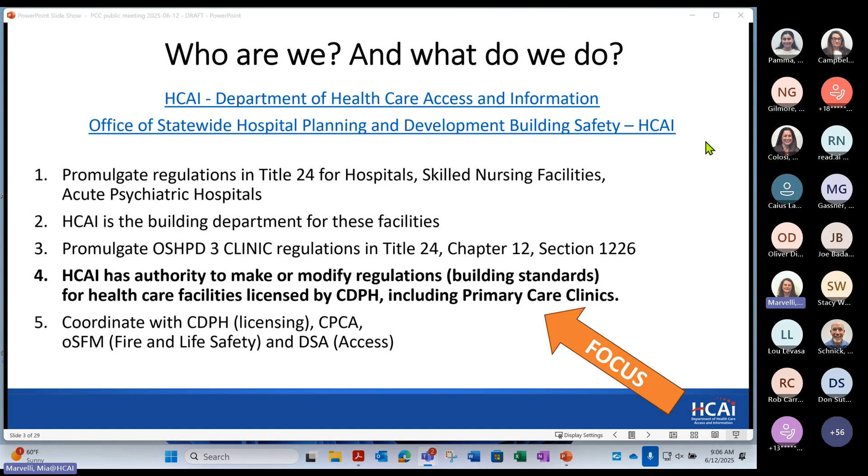The purpose of today's meeting is to right-size the primary care clinics regulations. We want to hear from you all on the challenges that you face getting compliance for OSHPD 3 and also how the regulations read. That's really our goal, is input on that.

We welcome any input on this, and we'll also be providing a slide in a little while that has an email address where we would very much appreciate email sent directly to us with suggested edits to the regulations, but also reasons why the change is needed. That is helpful for our regulatory process.

We are also going to explore ways in Title 24 to amend so compliance can be efficiently accomplished. And we also would like to discuss how to update what we call a code application notice, a CAN. And right now that is number 1-7-2100. We're looking at developing that more into a guide that can have more examples of clinics.

Currently, that CAN covers different types of clinics, and we're wondering if we should have different guides for each type of clinic, or maybe just subsets. So those are some things we're looking into. We'll talk about this a little bit in the future too, but we really would like your feedback by June 30th. I know that's a short timeline, but later on in the presentation, I'll be explaining the timeline for the regulatory process and the need for feedback as soon as possible.

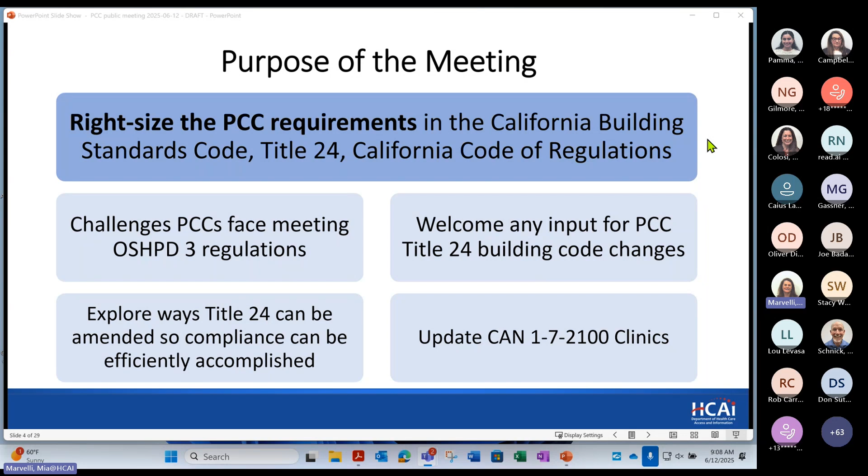Okay, so let's just recap what is OSHPD 3, so we can set the stage here a little bit. So Title 24, as we've talked about, contains minimum building standards or regulations for the construction and alteration of all buildings and structures in California. Title 24 is comprised of building, fire, electrical, mechanical, plumbing regulations, energy and sustainability regulations. There's actually 12 parts to Title 24, so it's a large volume of books, we'll say.

And our authority is to develop regulations for hospitals, skilled nursing facilities, and psych facilities, in addition to clinics that are licensed by CDPH, not all clinics. HCAI and OSHPD amend Title 24, Chapter 12, and specifically Section 1226.6 for primary care clinics. And again, we talked about the law. I listed it here. The law defines primary care clinics in the Health and Safety Code.

And just a reminder that CDPH is responsible for licensing primary care clinics and other clinics, and they promulgate Title 22 regulations, which oftentimes point to the Title 24 regulations. I'll just say that the law states back to 1204A, the law states only the following defined classes of primary care clinics shall be eligible for licensure, and those are called community clinics and free clinics.

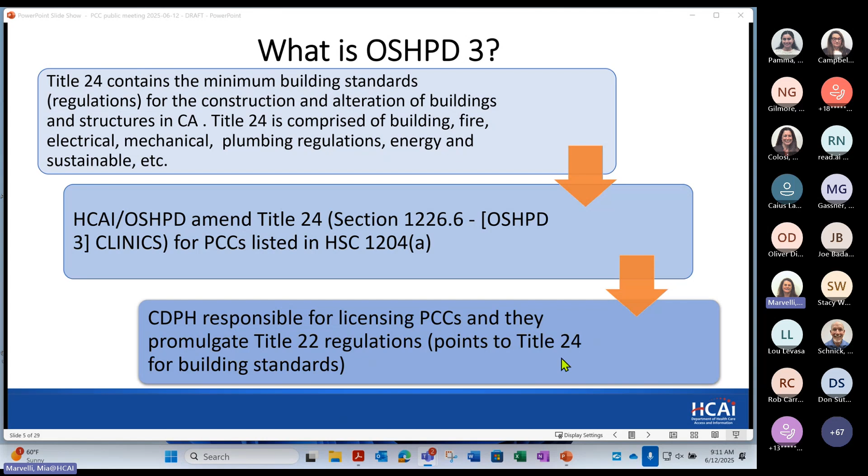All right, so let me go through. While reviewing the California Building Code, the architectural features, we looked at the scoping and application sections, and we noticed that the charging language could be amended in a few areas, and I'll get there. So the slide I have up right now shows all of the sections within 1226, and today's focus is primarily 1226.4 and 1226.6.

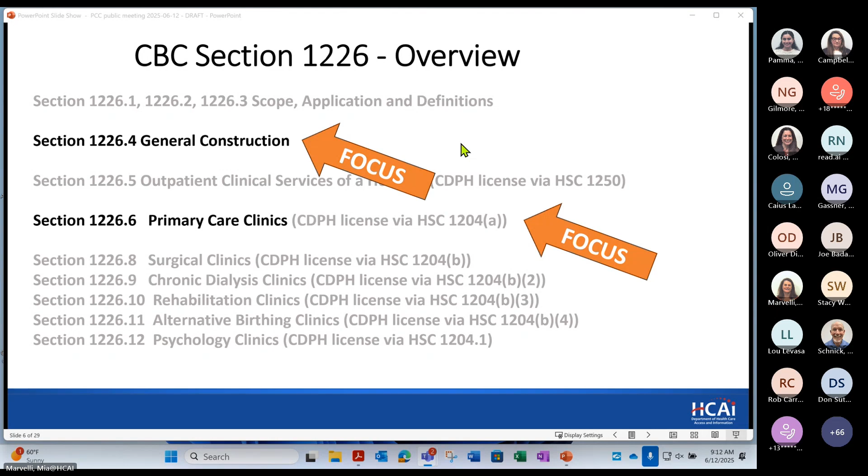So the scoping language at the beginning of 1226, the provisions of this section shall apply, and it points out primary care clinics include free clinics, community clinics. And what we're thinking is, would it be helpful to have some pointers to the Health and Safety Code for folks? Because what often happens is we get calls about clinics in general, and we need to ensure that the owner and operator first determine, are they being licensed through CDPH and how? And these laws tell them that. So we thought there would be an opportunity to add some of these Health and Safety Code pointers to that.

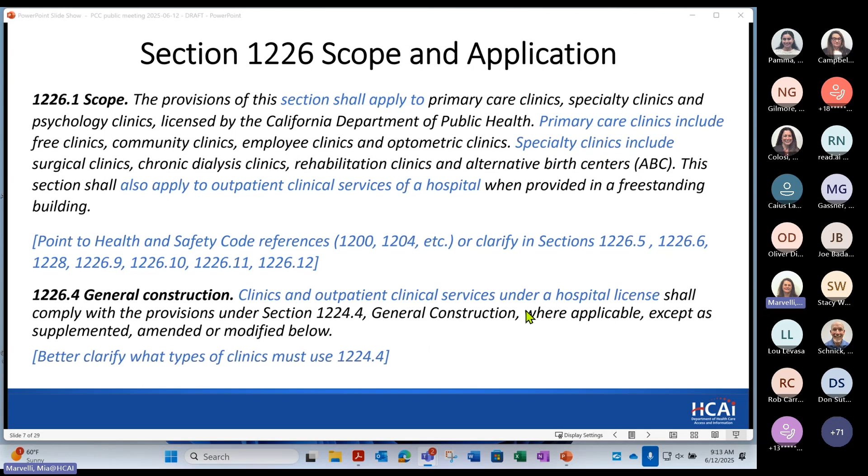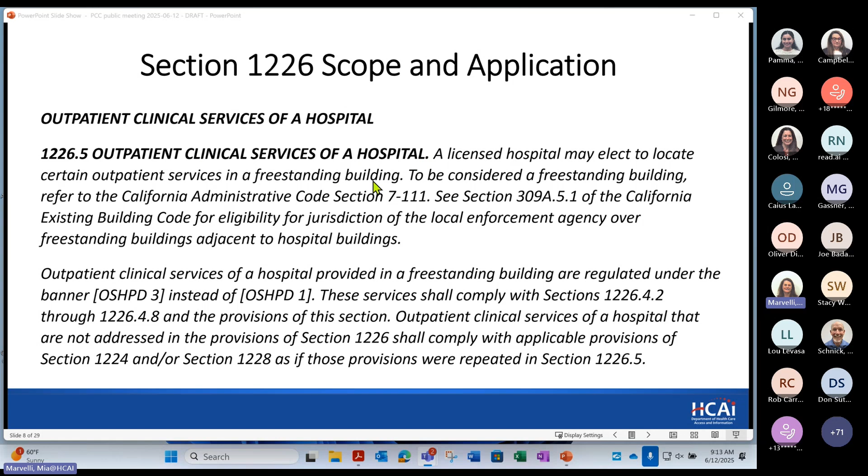And then, as I pointed out, here's section 1226.4 that says basically clinics and outpatient clinical services under a hospital shall comply with the provisions in this section, except where modified below. Should we better clarify what types of clinics must use 1224? So that's something we'll be looking into. Here's the charging language for outpatient clinical services of a hospital. I'm not going to read it all, but there may be opportunities here to clarify some information.

And then, of course, here's the charging language for primary care clinics. So primary care clinics and outpatient clinical services of a hospital that provides services equivalent to primary care clinics shall comply with 1226.4.3 through 1226.4.8. That's back to the general provision and the provisions of this section.

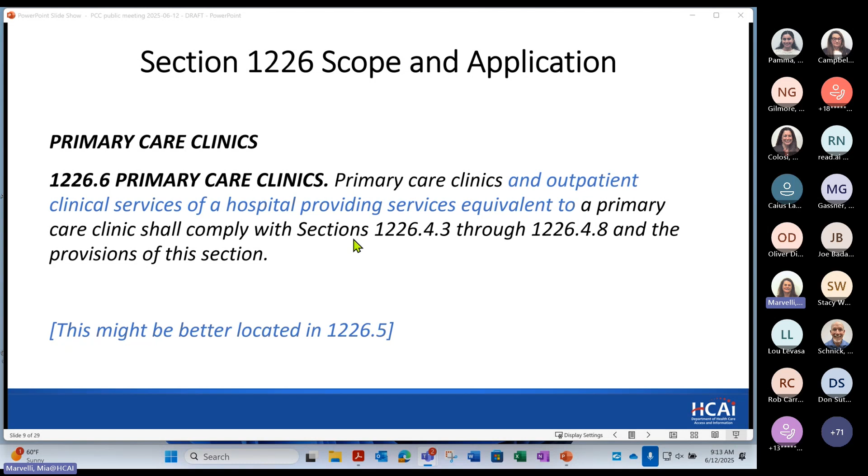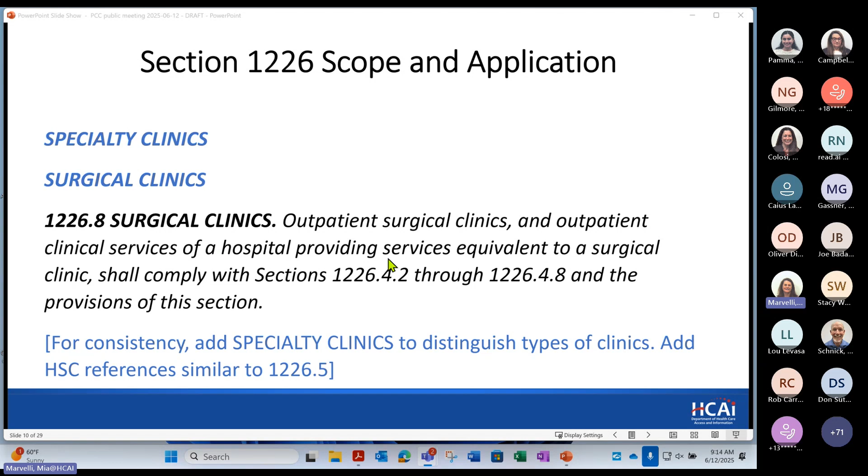Okay, so let's look at the comparison. We're gonna dive into the comparison table for the architectural features. But before I move on, I want to open it up for any questions. If you have a question, please raise your hand and we'll call on you to unmute. Joe, I see you have a question. You could unmute and ask the question, please.

Yes, the code changes that are being considered for primary care clinics, would those also be extended to hospital outpatient services that are equivalent to primary care clinics, or would hospital outpatient services be excluded from these proposed code changes? It kind of depends on where the overlap is. So for example, if we're considering for a very small clinic to, we'll say, reduce the fixture count, that possibly could help the clinic under a hospital license.

Okay, that's helpful. As a general rule, Joe, the clinics under a hospital license are capable of seeing up to 25% inpatient. So the standards will be held to a higher level. Right, I understand that. With my experience doing almost 24 hospital outpatient clinics, virtually all of them are remote enough from the hospital that they would never send an inpatient over there. They're like a block or 2 blocks away. They have to be within 250 yards, but I understand the 25% provision, but it results in a lot of overkill often.

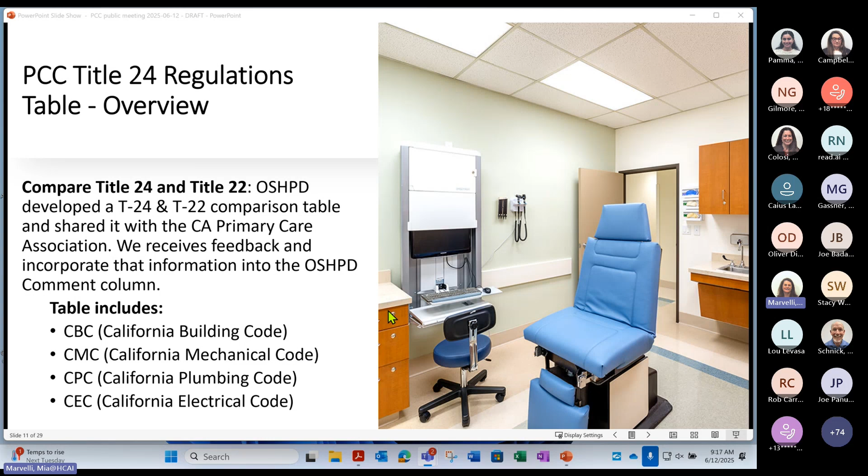Okay, so just a brief overview of the comparison table, and I'll call it up here in just a second. It's broken up into different sections. So the first section we'll talk about are the features in the California Building Code, and then Larry will talk about mechanical plumbing, and then Jamie will talk about the electrical part. Let me pop over really quickly to, here's the table. Okay, it's presenting. All right, good. So we've got 4 columns here.

The first 2 columns list the requirements, items, rooms for the primary care clinics. And we summarize the Title 24 section number and requirements pertaining to the item. So it's not the full text. The next column is Title 22. Many of the Title 22 regulations are related to space needs, operational functions, or reference back to Title 24. And then the far right column is our OSHPD comment.

These comment notes are based on prior discussions with the Primary Care Association and architects familiar with primary care clinics, and also a lot of the questions that we do get on clinics. We took their comments and edited the OSHPD comment column for today's meeting. You'll see that some comments say to be addressed in a guidance document, because what we're finding is there's really little opportunity to change the regulation because it might be out of our authority, but we can certainly clarify it in a guidance document. And one example is corridors, which we'll talk about in a minute.

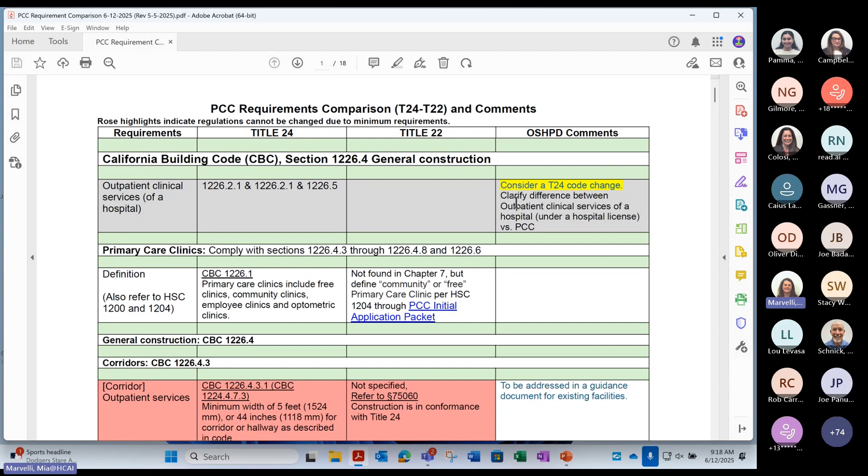And then, as you can see on this table, there's some rows with highlighted items, and those are either out of our authority or they're minimum building standards.

Some of these might be state fire marshal related that we don't have the authority to change. Some of them might be access, and in some cases they're kind of the minimum requirement. So that said, we also have identified that these may benefit from further clarification. For example, there are several requirements for corridor widths depending on the patient care. And for the most part, primary care clinics would not need to meet the higher standards. This can be clarified in a guidance document.

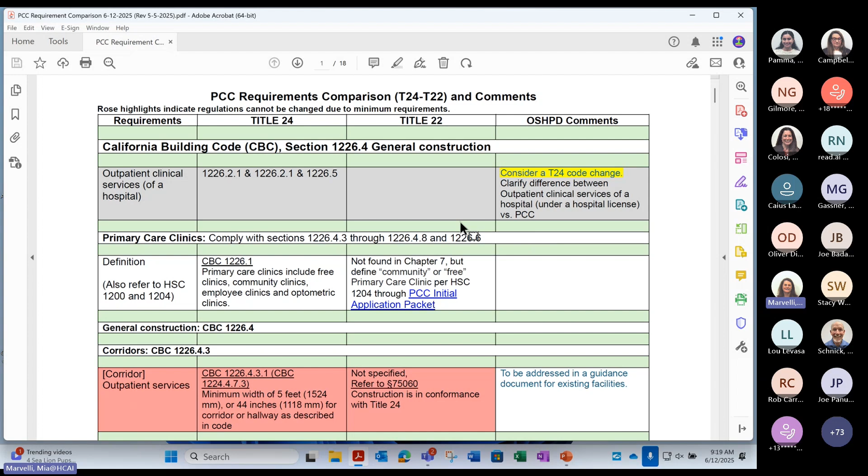Can you clarify rose and rows? Yes, rose colored, highlighted rows, ROSE, versus the ROW row. Sure.

Okay, all right. I'm going to move on to the first part of primary care clinics, which is the general provisions, which is in 1226.4, which many of the clinics point back to. We'll talk about corridors a little bit. So I think the key here is outpatient clinics and outpatient departments consisting only of waiting rooms, business offices, doctor's offices, and exam rooms, where there is no traffic through such area or other services or exits, shall have a minimum corridor hallway width of 44 inches.

So there's a lot of wiggle room here for just the minimum 44 inches. There may be instances where you have to meet the 5 feet. And I'm going to go through all of these and then we'll pause for questions on that. So just keep rolling here. It's probably pretty rare that a clinic would have, again, we're not talking about surgery clinics here, but it's pretty rare that we would have a clinic with bed and gurney patients that would require the 8 feet.

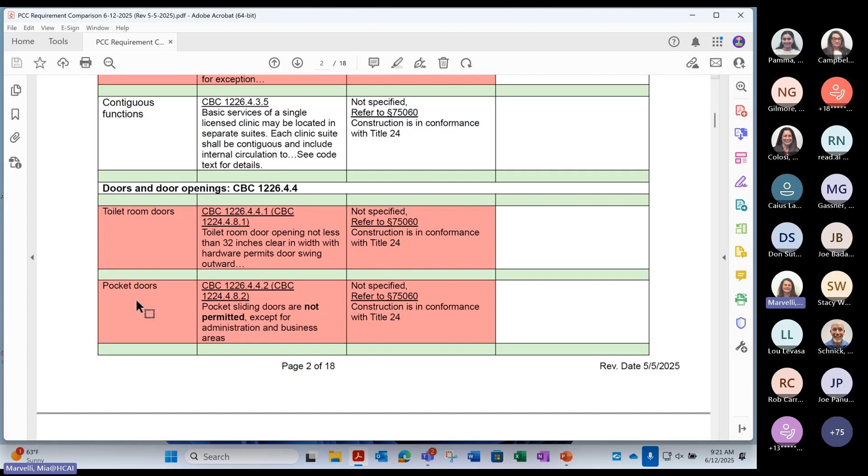I have pocket doors listed here. So what we're finding is we get a lot of questions about, are barn doors allowed? And we've done some research and barn doors are allowed in exam rooms and treatment rooms. And so we may add an edit that explains barn doors. Also, we're looking at if the doors should swing outward in the clinic. In the toilet room? Okay.

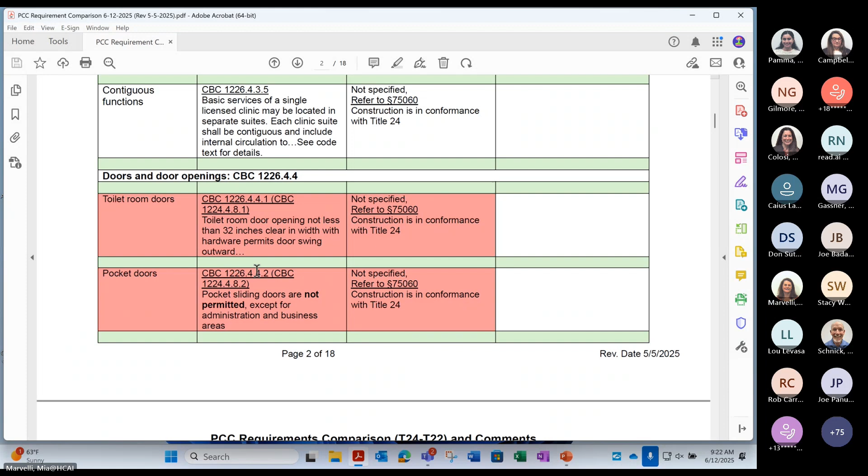Not really much to say about windows and screens. Those are not required in treatment rooms or exam rooms. So that's really for patient rooms. We get a lot of questions on the minimum ceiling height. Right now, the minimum ceiling height is 8 feet. We understand that this can be challenging when you're modifying an existing clinic. We actually have, in the checklist that we have for clinics, a provision that allows the ceiling to be at 7'6" if you're remodeling, if it's an existing clinic. Again, we have to set a minimum in the regulations.

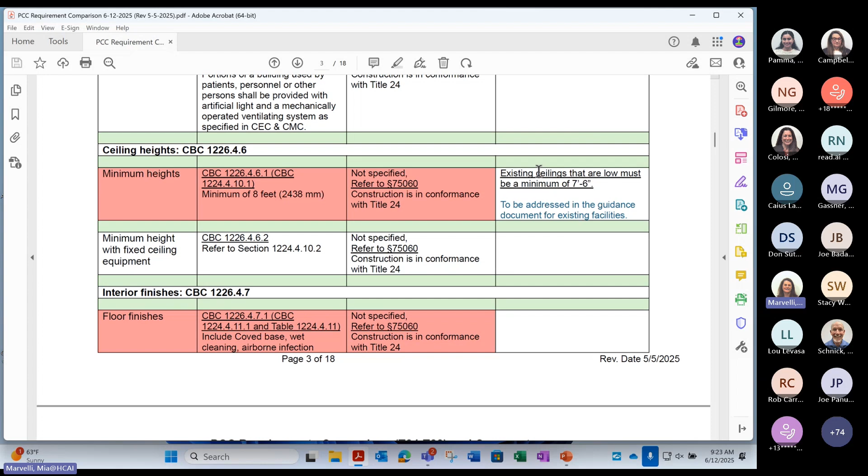We had a hand up for that one. We can pause and go. We have a raised hand from DS. Do you want to ask your question? No. Lowered hand? Okay. All right, I'll keep rolling here. We have a raised hand from Glenn. Okay, Glenn. Yeah, good morning.

A clarification on what you just said, Mia. When you say existing clinic, is it an existing licensed clinic or is it a non-licensed space that was providing medical services that's becoming a newly licensed clinic? It's supposed to be a previously licensed clinic. Okay, thanks. So, no, it's an unlicensed clinic that's trying to get their license, because their previous license is probably going to already meet the requirements. So that's why we're allowing a little flexibility for the non-licensed clinics that are trying to get licensed to become OSHPD 3. Okay. That makes sense, Glenn?

Sort of. It really depends, Richard, and we can talk offline about some of the stuff that I've seen come in before. But I won't belabor this point. Yeah, but we're trying to put some flexibility for existing conditions, like an exam room that doesn't quite meet the 80 square feet. There's going to be a minimum cited in the guidance to say that we're not going to make them make the exam rooms larger. And so we're looking at those as options. The difficulty at times is doctors' offices wanting to become licensed clinics. Understood.

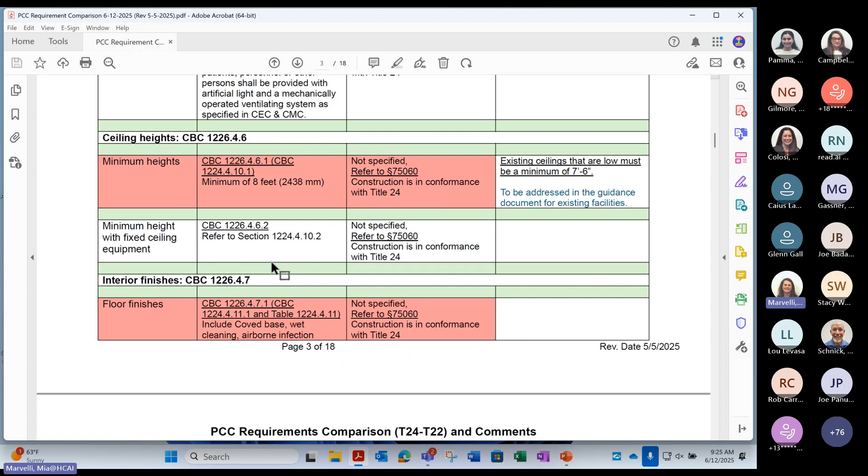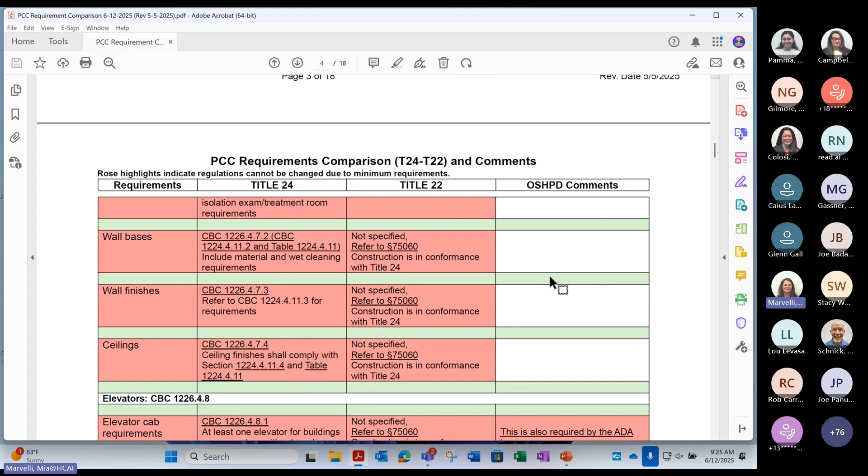Thank you. Thanks, Glenn. I'm going to go kind of fast through interior finishes here because we don't seem to get a lot of comments; we did get some comments on wall base and coved base. We're going to take a look at that. We may have an error in some pointers. But this is pretty basic minimum need for infection control.

Yeah, I thought I heard someone, sorry.

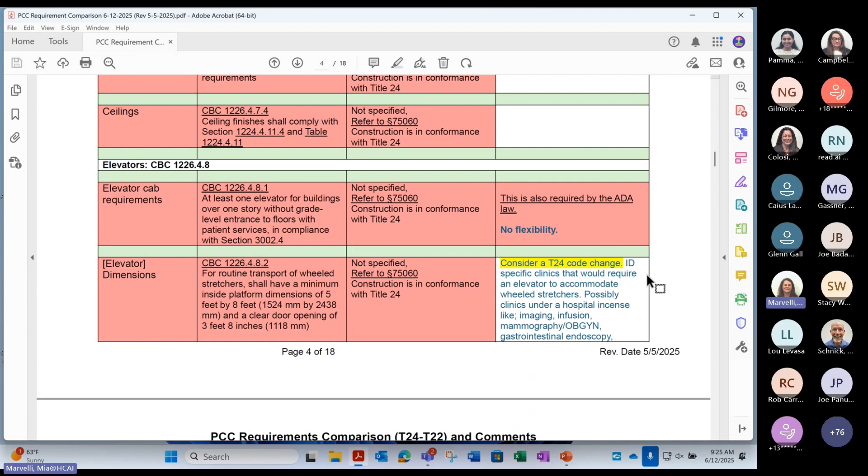Again, elevator, this could use some clarification in the guide, but the reality is the elevator cab sizes are out of our authority to change. Those are either state fire marshal or ADA requirements.

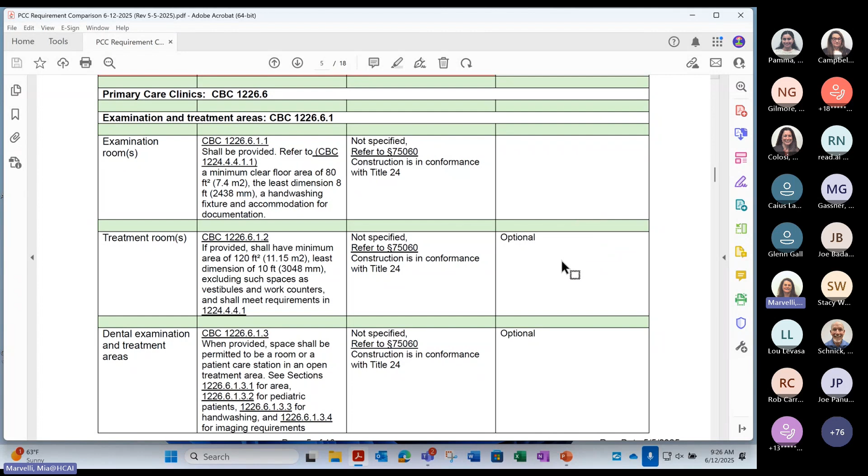Okay, so now we're entering into the actual primary care clinic section. Exam rooms, we've talked about this minimum of 80 square feet with a minimum dimension of 8 feet. It does require them to have a hand washing fixture and accommodations for documentation. Treatment rooms are optional, so we have some minimum sizes for the treatment rooms. I'm going to skip dental. It's pretty rare that a dental service is provided in a primary care clinic, but the features are there.

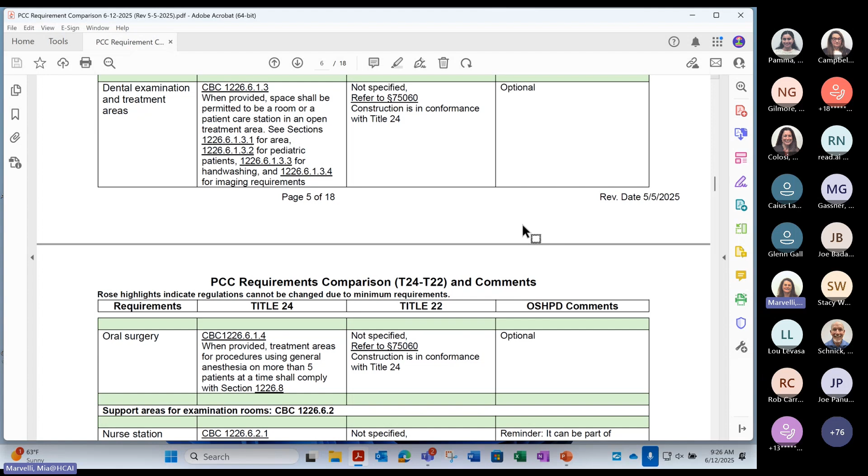One thing I forgot to mention is when the clinic regulations were first developed, we paralleled the FGI guidelines, outpatient. And while California is not mandated to adopt those, they are a national standard that's used for reference as a basis for the code. So there's support areas for the examination room. Just hold on one second here.

So the nurse station, perhaps there is an opportunity for a code change here. I think traditionally the nurse station was considered support for patient rooms, but this area can be combined with other areas and can double as a charting station. So we'll look into this a little bit more, but this also could benefit from some changes.

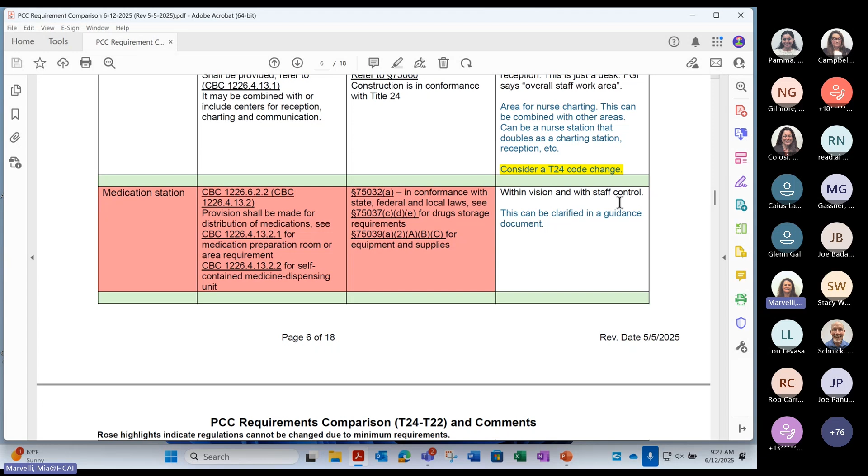Medication station, really, you just have to have something within the visual control of the staff. And this could be clarified in the guidance document. It doesn't mean that you have to have an entire medication station.

And then we get into areas like the clean utility, soiled workroom, garbage, soil waste, medical waste. There seem to be a lot of questions on what's required and the sizes for these, because I think there's only one of them that has a minimum size standard. But what we need to know is, in many cases, these must be separated, because we're trying to minimize the risk of cross-contamination for infection control. This includes separating the clean and dirty areas.

That said, if minimal space is needed for housekeeping, again, if you have a small clinic and you don't need a lot of space, you can use a cabinet or closet, and the same for clean utility, soiled holding. These can be small areas as long as they're separate spaces. Anything to add on that?

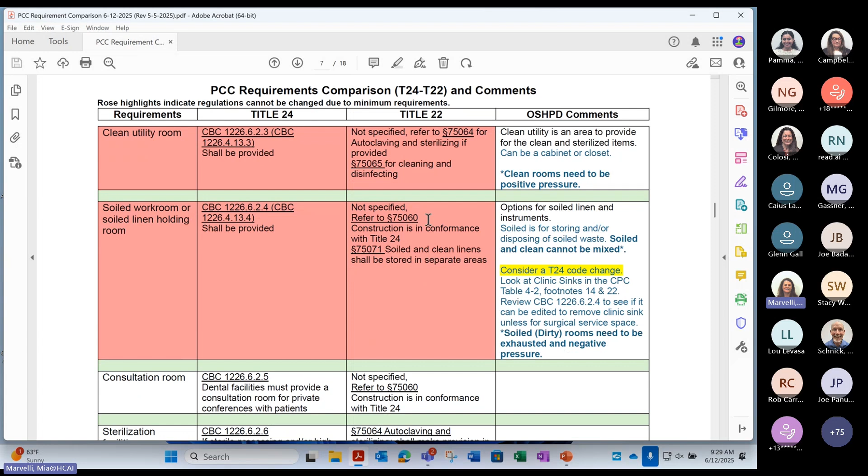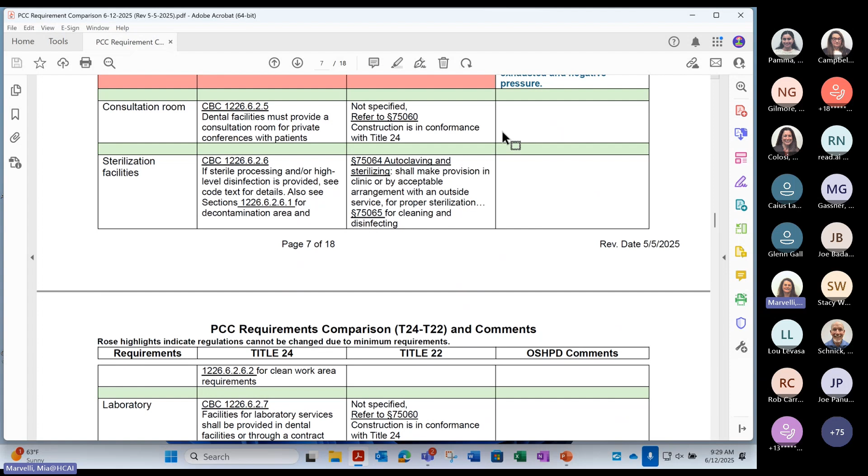This consultation room is actually for dental facilities. Sterilization facilities, this is if it's needed. You may not need sterilization facilities in a primary care clinic. Same with lab facilities. So then we get into the support area for the patient.

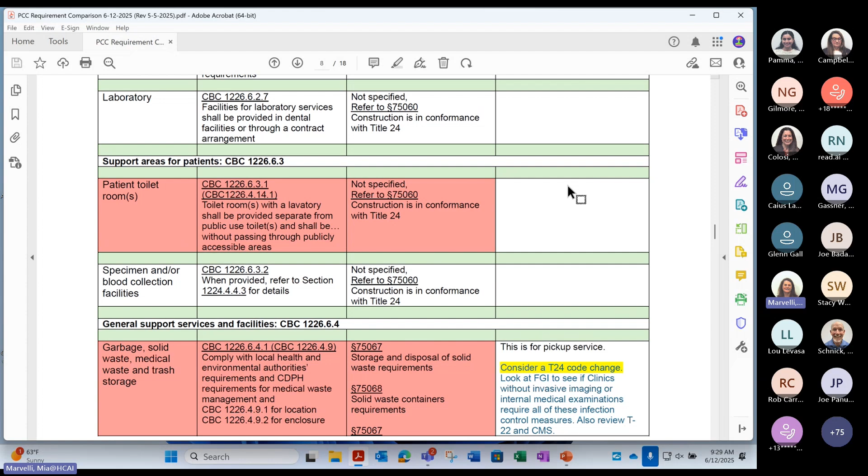You do need to have a separate toilet for the patients within the clinical space. This is separate from public use, and the purpose is they may need to use the restroom immediately off of an exam room, and they should not be passing through a publicly accessible area. We'll be looking into that in the future, but this probably won't change because this is a requirement.

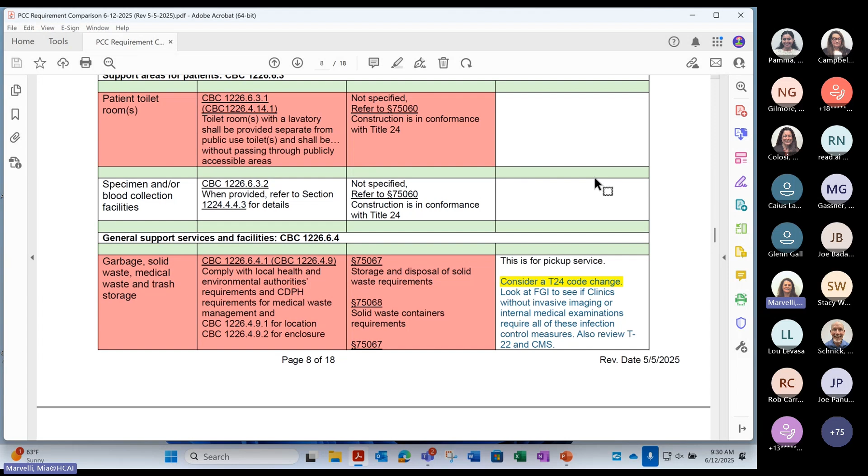Specimen or blood collection may not be necessary in a primary care clinic. So again, this is voluntary. It says when provided. And then we talked about garbage, solid waste, medical. We'll consider this as a code change. We're going to look at FGI to see if clinics without invasive imaging or internal medical examinations require all of these infection control measures. We'll also look at Title 22 and CMS.

So housekeeping, this overlaps a little bit with the plumbing code. The janitorial housekeeping room needs to exhaust outdoors. We'll talk about that a little bit later. It overlaps with the mechanical code as well, just like a toilet or a shower or laundry room. So there's a need for this to be separate.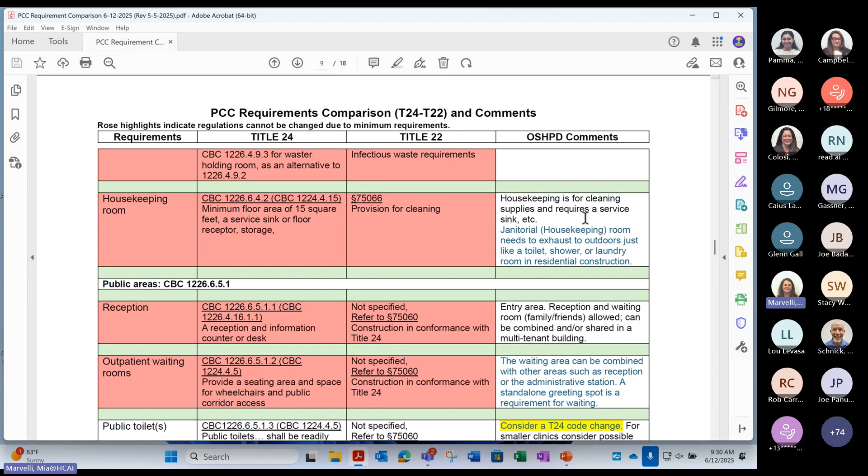When we've got reception areas and outpatient waiting, if you take a look at contiguous spaces, we can combine this and we can clarify this a little bit more in the guide. Normally you have reception, you have your medical record storage there. You can have a lot of things going on in the reception area that accommodates the outpatient waiting room.

We talk about public toilets. Again, those public toilets can be located within the building. They do not have to be in the waiting area. I think that's pretty clear, but we can take a look at that. For smaller clinics, there is a provision that allows for smaller clinics to share the public toilet room with the staff. We'll double check with that. No, with patients, I'm sorry, the patient room.

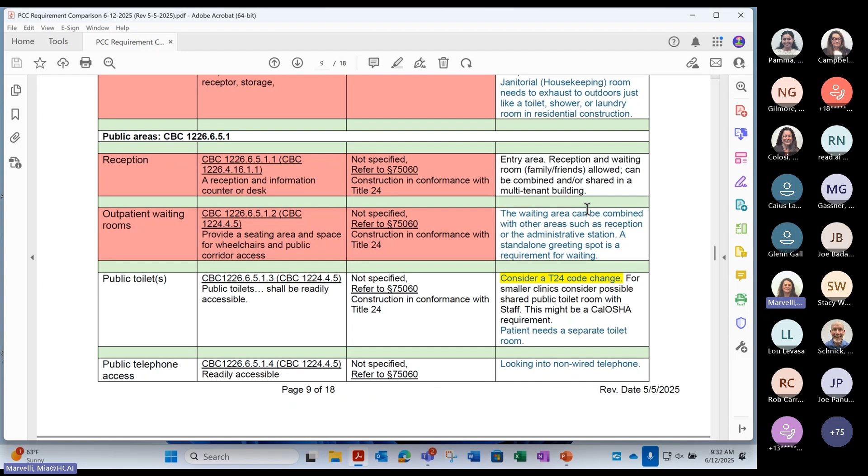And then public accessibility, this public telephone, we're looking into, can it be a non-wired telephone? So if you have internet service, I noticed that the FGI requirements have been changed that says as long as there's Wi-Fi. So we're looking into whether you actually have to have a hardwired public telephone access. We're also looking into, is it necessary still to have a drinking fountain? Title 22 says that the construction should be in conformance with Title 24. So this may have been a carryover from FGI.

I talked a little bit about medical records being combined. Again, we know that this is going electronically, so a computer station could be sufficient to meet this. And then equipment storage and supply is simply storage area for the administrative needs of the clinic.

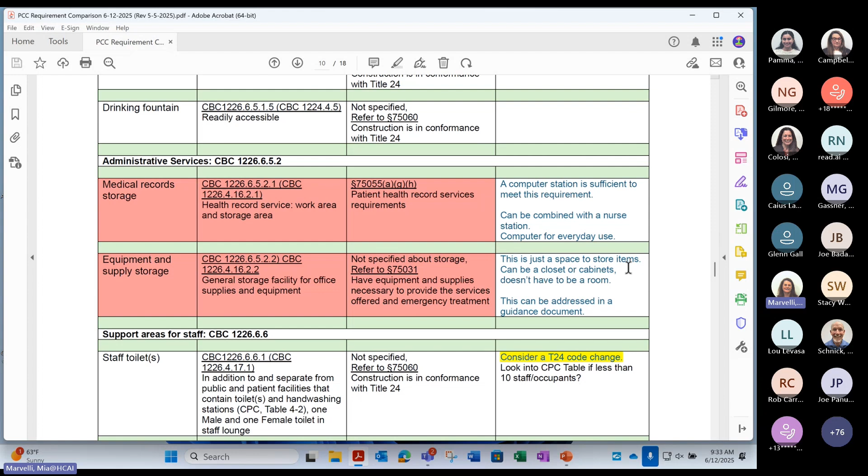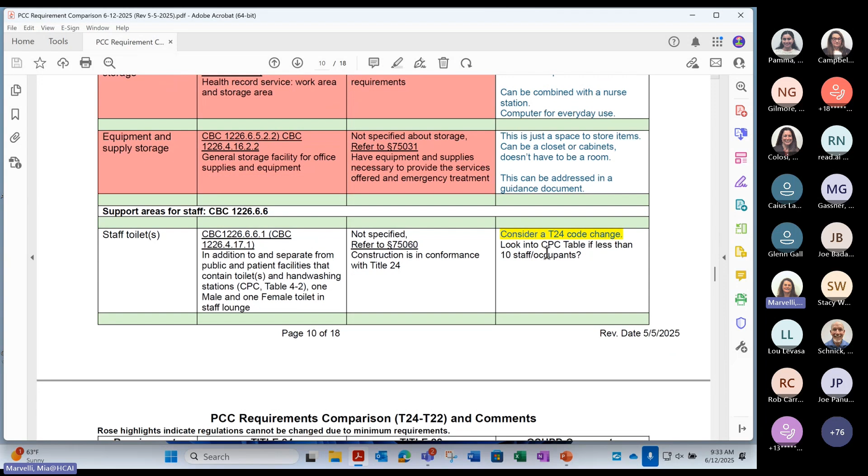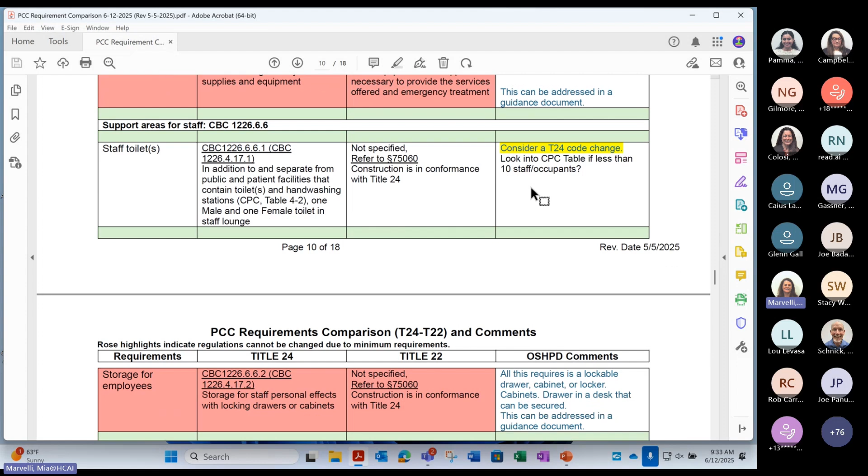And then we're looking into the staff toilet ratios. Could we do a change to look at if a clinic is less than 10 staff or occupants, reducing that down to one toilet? That's a Cal OSHA alignment. The two, the male, female? To be shared at 10. Okay. And then storage for employees, all this requires is a lockable drawer, storage, or cabinet. Doesn't have to be a whole locker room or anything for clinics.

So I can pause there because we ended the architectural features and open it up for some questions for the architectural features, and then I'll turn it over to Larry. We have a question from Bill. You could unmute yourself and ask a question, please. Yeah, good morning.

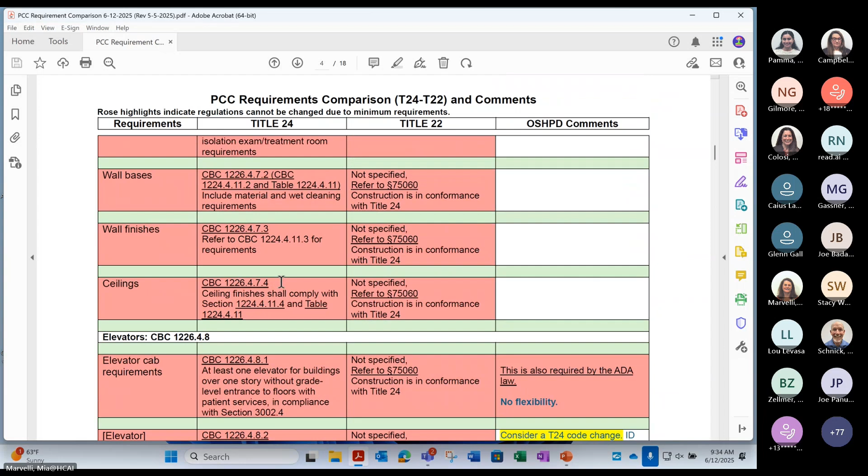So on slide 2, regarding the corridors, I've got a suggestion or an area that I find confusing. The information on what we can share is kind of tucked away in corridors. I'm wondering if it ought to have its own separate heading. So the contiguous functions, that code section really speaks to, you have to have a corridor that connects all of your stuff inside your clinic. But the exceptions to that explain you can share this, this, this, and this.

And a lot of our people end up looking, they'll remember there's some place in the code that says we can share certain things. Where do I find that? And you wouldn't think to look in the corridor section of the code. So that's my comment. Okay, thanks, thank you. So some sort of a pointer. Or relocated.

I think to Bill's point, I think in the hospital code, it's in the charging language at the beginning of the support that these things have to be per unit, but these things can be shared. Okay, so maybe we have something at the beginning of 4. Mm-hmm. I'm just making notes here. Okay, thanks, Bill. Thank you, Bill. We have our next raised hand from Glenn, so you could go ahead and unmute, please.

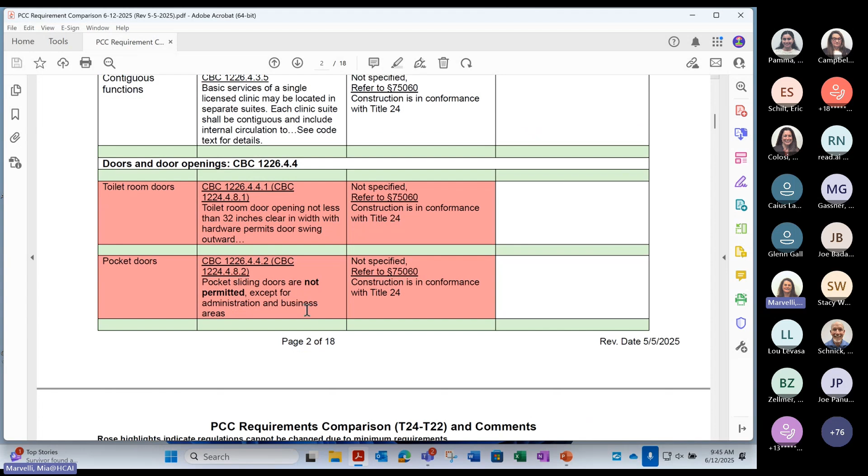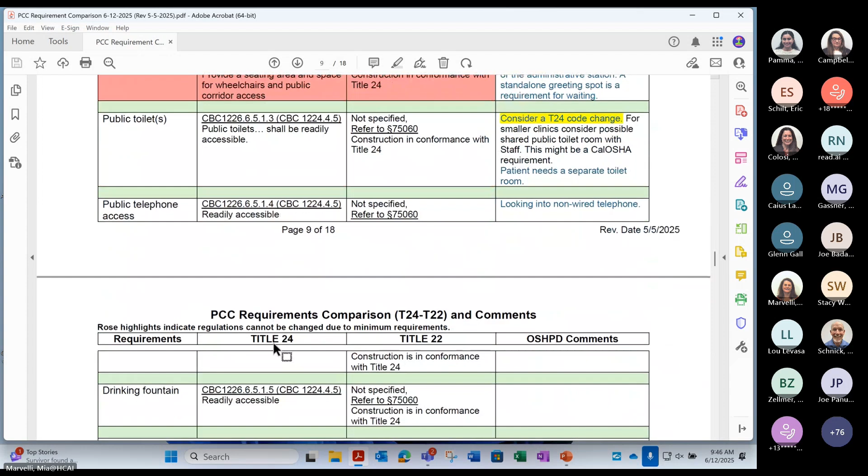No more raised hands? Okay, all right. Well, we're gonna do a little room shift here, so bear with us. I'm gonna turn this over to Larry for mechanical. Hello, I'm Larry Enright, Senior Mechanical Engineer on the Building Standards Unit. Yeah, switch down to Part 4, California Mechanical Code. Pretty far up there. Yeah. Okay. All right, here we go.

So just a little background. OSHPD includes amendments to the model code related to healthcare facilities. And when we started, many of these were based on the U.S. Department of Health and Human Services guidelines for construction and equipment in hospital and medical facilities. Those have since branched off to the Facility Guidelines Institute and then ASHRAE 170 for ventilation of healthcare facilities. And so for OSHPD 3, it's broken up into OSHPD 3 with surgical clinics and then OSHPD 3 just general.

So I'm going to cover a couple of the highlighted sections today, but feedback on these amendments will be appreciated as we look into the applicability of these amendments for the lesser acuity functions. And then I want to just point out that there are also some minimum code provisions in the model codes that apply to the primary care clinics, and those cannot be reduced by OSHPD. However, the specific applications might be able to address some of those issues, and some of the guides that we're looking into developing.

So first up, natural ventilation. Ventilation is required to be primarily provided by mechanical ventilation. I just note that secondary ventilation can be natural if there's windows, but essentially mechanical continuous operation is required for clinics. Under the continuous operation provision, it's supposed to be operated continuously anytime the building's occupied. There are exceptions in there for unoccupied mode to be permitted, and that aligns with Part 6 energy codes.

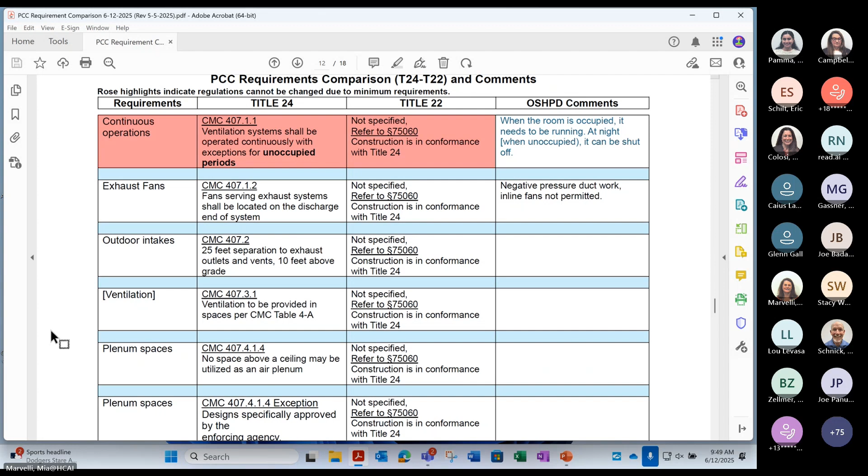Plenum spaces: OSHPD does have an amendment. However, model code does too. I'm currently looking into whether certain lower acuity spaces could potentially use a return air plenum.

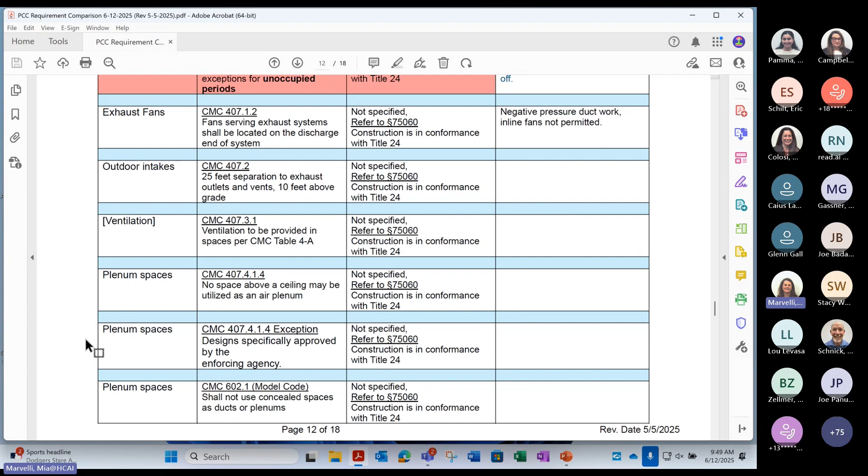And then moving on to filtration. Filters, typically, if they require MERV 14, require a pre and post filter. Currently our table 4B's filtration requirements are based on the original healthcare requirements. So we're looking at bringing MERV filtration identified per each space, and potentially many clinic spaces can have a single MERV 13 pre-filter. So that'll be something to look at in the next code.

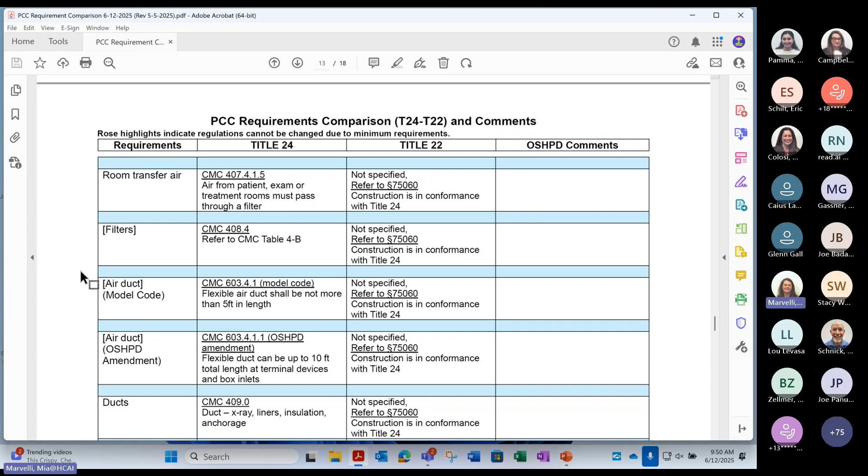Larry, I have a question. So are MERV filters required regardless if you're OSHPD 3 or not? Yeah, so for basic clinics, we have mechanical code, but Part 6 energy code and CALGreen require MERV 13 for non-licensed clinics. Thank you.

Air ducts are limited by the 5-foot limitation. We extend the model code 5 feet to 10 feet just due to the hospitals and other spaces having really congested ceilings.

And then there's some other items here that we just brought up: odorous rooms. You mentioned plenum and duct, plenum return. Can you explain when plenum return might be acceptable versus ducted return? Yeah, so the lower acuity spaces. So clinics with a consult, so in other words, people that aren't sick, maybe rehab spaces, counseling, et cetera. Yeah. Thank you.

And then should we take questions now? Just part 4. Are there any questions currently with mechanical code provisions? We have a question from Glenn. You could go ahead and unmute, please. Good morning, Larry. I'm back.

Good morning. Right now, OSHPD adopts the 2013 edition of 170 and further amends it a little bit. But the 2017 edition actually was expanded to address outpatient settings, including primary care clinics. And the requirements really are lessened in those facility types. And it is the national standard referenced by the federal government.

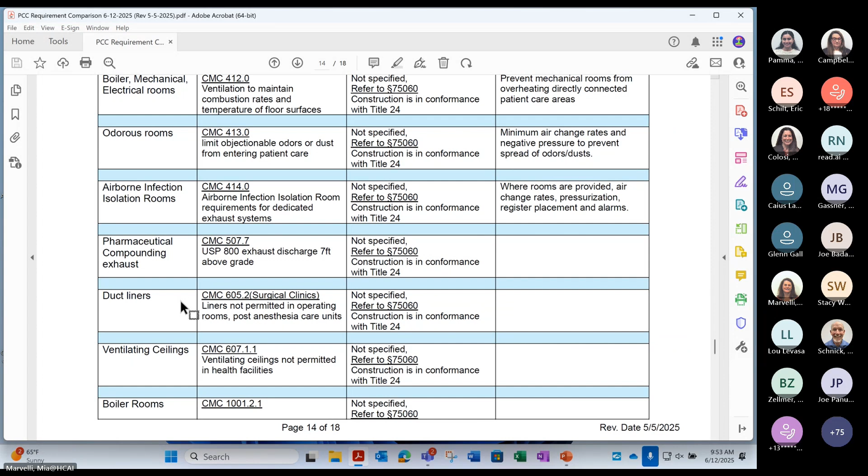Okay, so we'll go ahead and move to part 5 for plumbing code. So the main item here is plumbing fixtures, and over the last couple code cycles we've been looking at fixture counts and how model code requirements and the facility requirements from the FGI combine and intermingle. For the smaller type facilities, there are some ways that we can look at adjusting the code or making things more clear to get those to align a little bit better.

However, the main concept is the fixture counts are based on providing separate facilities for patients, staff, and public or visitors. So intermingling those 3 components is what we're trying to prohibit with the facility requirements. The current clinic provisions allow for shared public and patient fixtures for clinics with no more than 3 exam rooms. Again, if it's in a main facility, the public can share the main public restrooms outside of the clinic.

However, one of the intervening code changes we're looking at is when staff can use a single facility compared to having separate male and female, and then working the male-female counts into the overall fixture counts. So the staff one is being addressed in the future code amendments? You are looking at the 2025 intervening. Right, thank you.

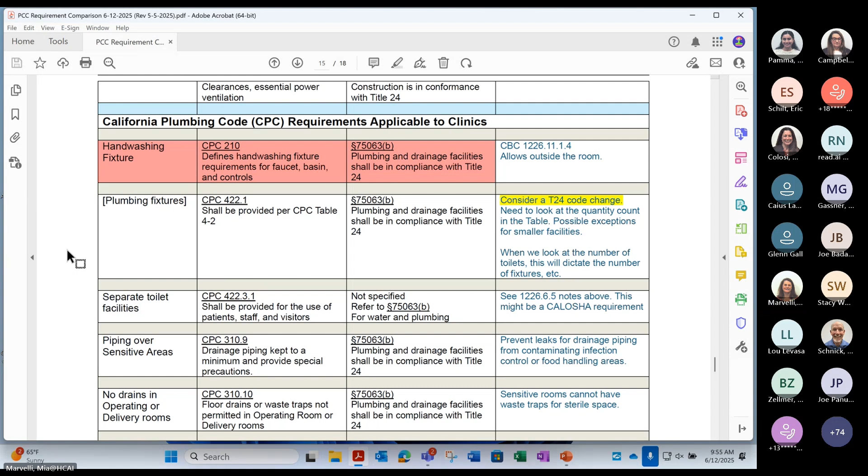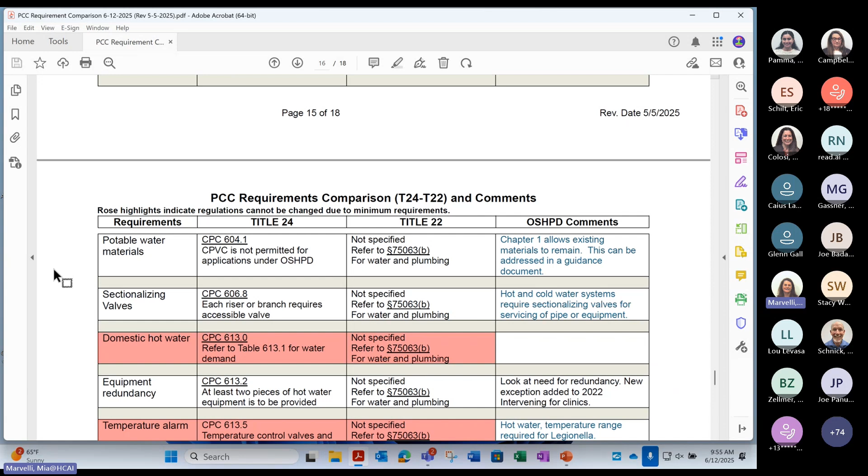Moving over, potable water materials. CPVC is not permitted under OSHPD. I want to point out that the chapter 1 plumbing code allows existing materials to remain. Actually, we do have some guidance on underground services. Yeah, this is the plastic piping versus cast iron. There is a prohibition of CPVC in healthcare facilities. And then cast iron for the waste. The waste is ABS; CPVC is currently prohibited. OSHPD's looked at it previously, and we're not able to change that.

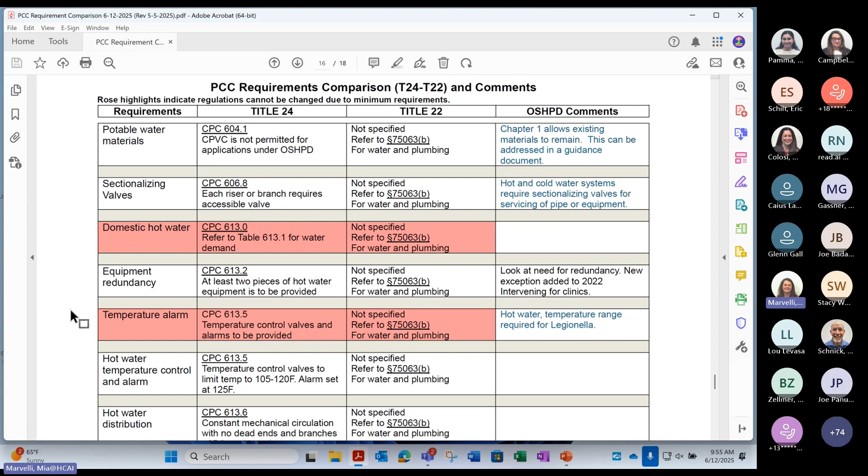Another item is hot water redundancy. So we previously put in an exception for clinics doing only hand washing, where they don't need to have redundant equipment. They usually have smaller water heaters. So that's already in place? 'Cause I heard that the other day from people. Yeah, I think that one was in the July supplement to 22. Okay.

And then hot water temperature. So hot water recirculation, that's the 25-foot max branch lengths. That's to limit Legionella.

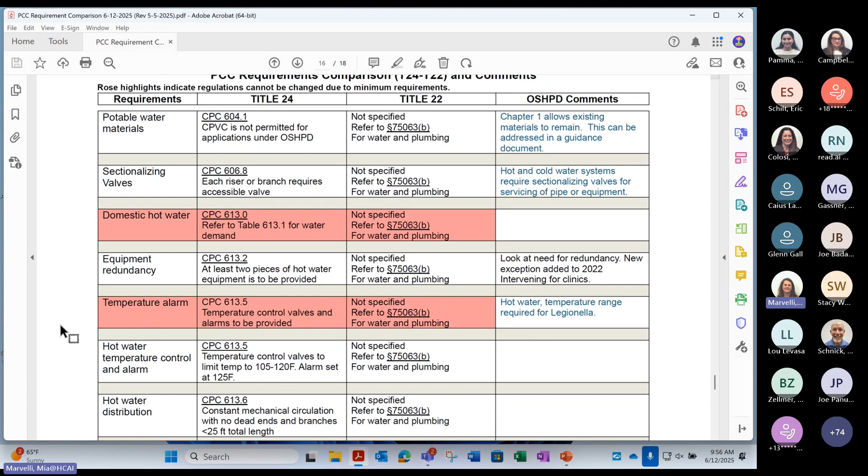As far as dialysis water systems, we have received previous provisions that have helped adjust the material provisions that allow such as CPVC and PEX. So that's been a process. Other than that, that's all I have for part 5. If there's any questions, we can go ahead and take those.

We have a question from Joe, so you can go ahead and unmute yourself, please. Yeah, just with regard to number of plumbing fixtures, I think it'd also be helpful to clarify when separate sex or multiple toilet rooms are required for the waiting area. That sometimes comes up in local plan review. Okay, thank you. Thank you, Joe.

We have another question from Eric. You can go ahead and unmute, please. Yeah, question on the cast iron for the waste piping. We've come up to a couple scenarios where we have ABS underground, and wondering whether there have been any discussions about possibly allowing that underground in existing facilities that we were trying to convert.

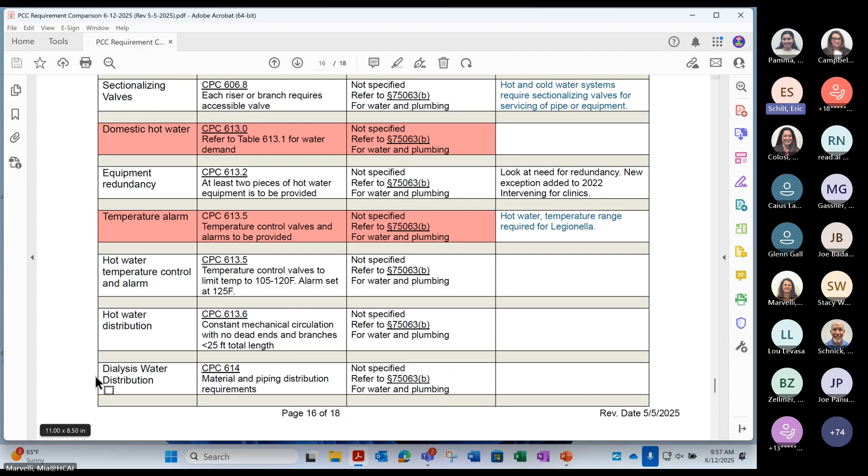Yeah, so in our... okay, that's fine. Yeah, so I think that's in our current clinic checklist. So if there's an existing building coming in to do a licensed clinic, the underground can remain, is what's in our current checklist. Yeah, if you have under slab PVC, it's allowed to remain in place, even if the cast iron dumps into it. Thank you.

Thank you, Eric. We have another raised hand from Bill, so you can go ahead and unmute, please. Yeah, good morning again. Hey, Jamie, question for you on quantifying the number of staff for this toilet room exercise and how many toilet rooms we need. When you go through the regular process to determine occupant load and therefore how many toilets you need, it doesn't separate out how many of those occupants are staff. So what we end up doing is saying, well, how many people are we going to employ in this clinic, which is kind of imprecise.

And we're always wondering if a local building department is even going to accept that. So I don't know if that's a code change thing or a guidance document kind of thing, but that would be helpful to know. How are we supposed to quantify number of staff? Yeah, that's a good point. First of all, you want to make sure you're using the right table. We consolidated everything into table 4-2 now for staff, patients, and public, correct? It mostly points to 4-2.

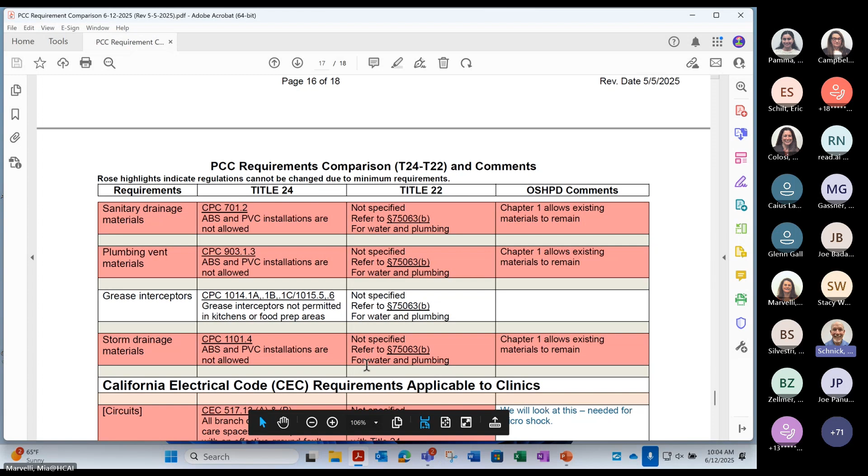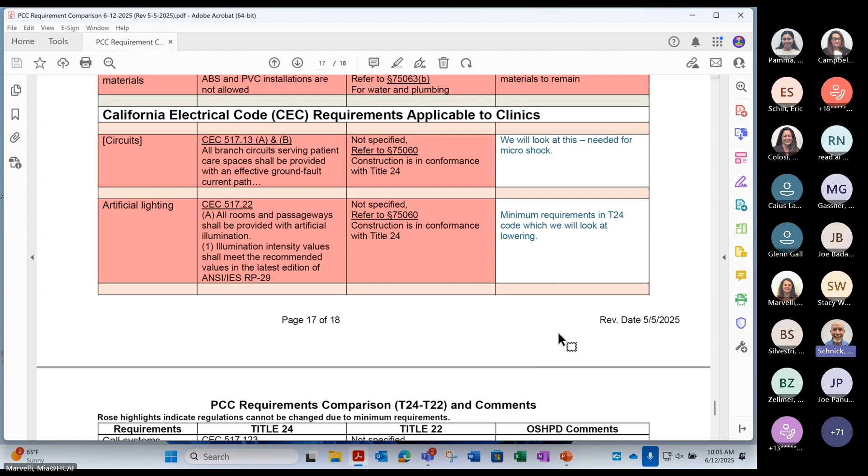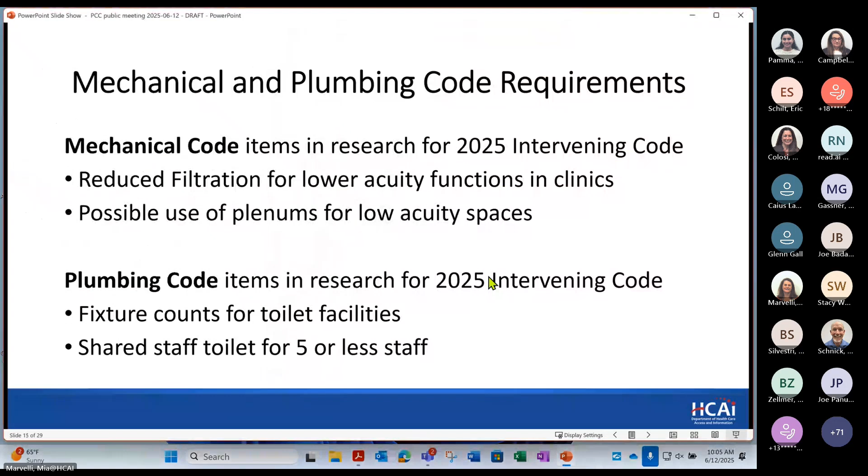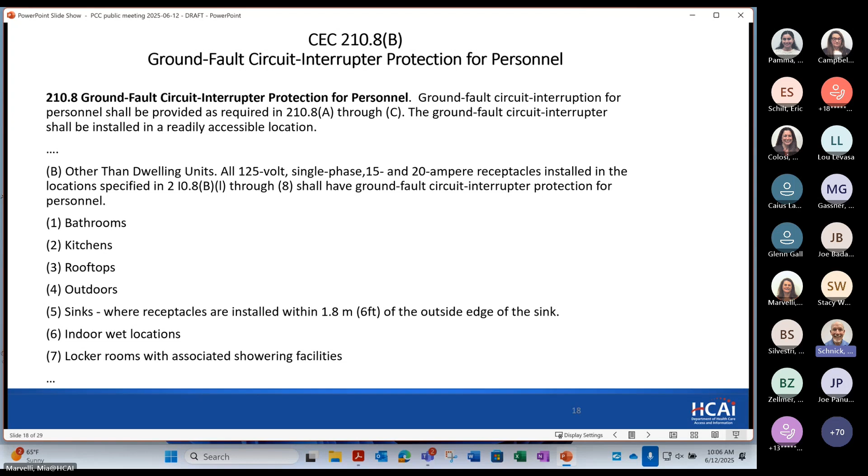Next slide, please. So the ground fault requirements are similar for any building. Specifically bathrooms, kitchens, rooftops, outdoors, when you're within 6 foot of a sink, indoor wet locations, all require ground fault circuit interrupter protection for personnel. Next slide.

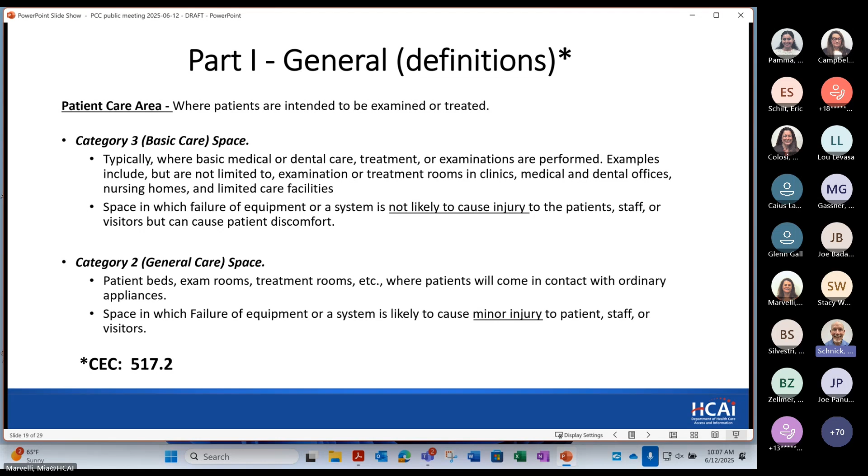Now I'm going to go through real quick just definitions because it applies to the requirement for redundant ground path. Patient care area is defined as areas where patients are intended to be examined or treated. And typically we would see that we're going to have in our clinics either category 3 basic care spaces or category 2 general care spaces. The general care space is one in which a failure of equipment is likely to cause minor injury. The basic care is where failure of equipment is not likely to cause injury. Next slide.

So the reason I went through the definitions of patient care areas is because the code requires that patient care areas have redundant ground path. And so that means the wiring method would need to be in a metal raceway system, or a cable having metallic armor. And this would require an insulated copper grounding conductor. So this would not permit, for instance, plastic pipe that's typically put in the concrete to service tables or chairs that are in the center of the room. That would have to be routed in a different manner. Next slide, please.

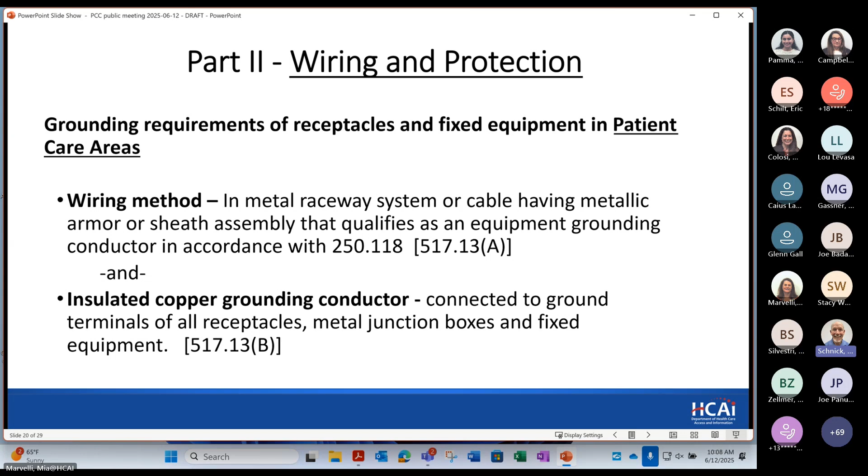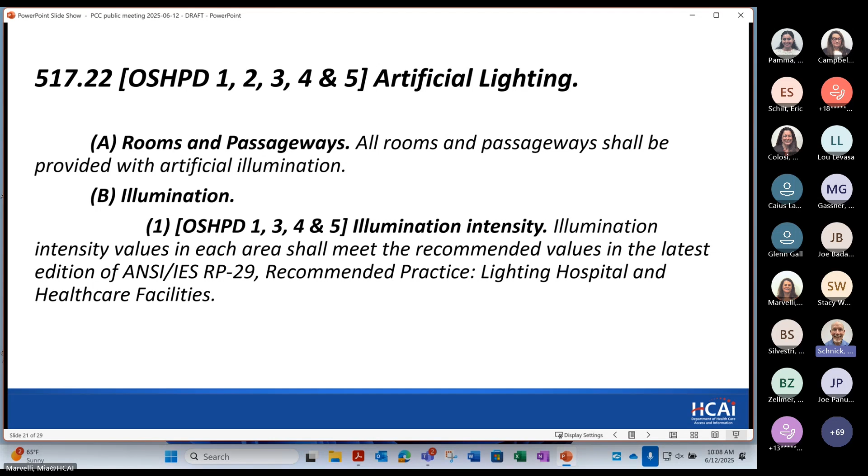Artificial lighting, nothing too special. All rooms and passageways shall be provided with artificial illumination. And then our code 517.22 requires that you meet the recommended values in the latest edition of the ANSI/IES recommended practice 29. Next slide.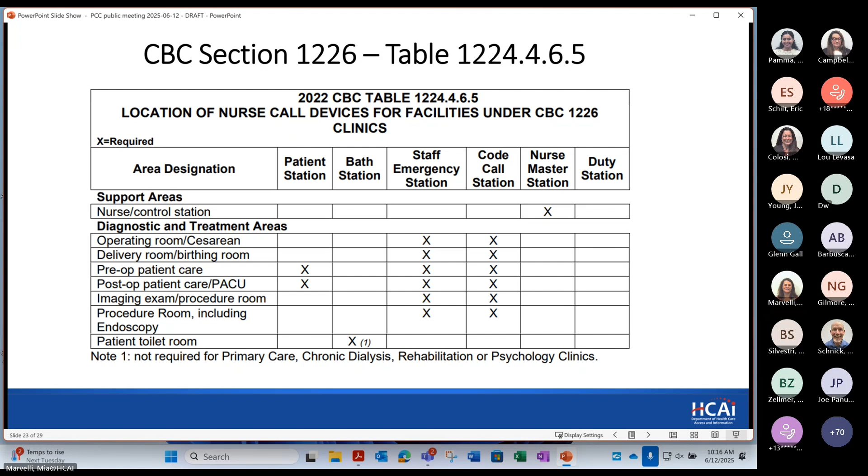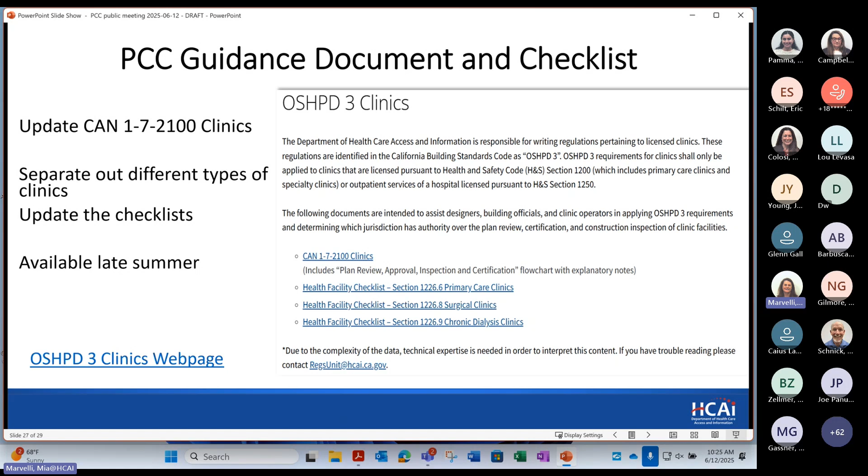I think the next slide is the checklist. Sorry, yeah. Okay, the checklist will provide a list of the applicable building code sections, used by the design professionals and the local jurisdictions when checking compliance with Title 24. So our goal is to have the guidance document and the checklist ready by later this summer. So this is about the guidance document and the checklist, and if any additional questions about this.

Feedback. Okay. So that homework slide we had up before, that's the same email address. So it's the regs unit at hcai.ca.gov. You can send in comments about either the existing CAN. I mean, the best thing is you can send in info on the existing CAN or the existing checklists that are on our website, and also comments on any proposed code changes.